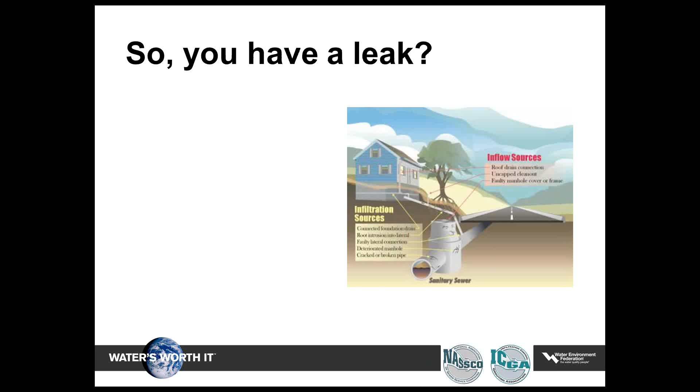So we'd like to start off with a simple question: you've got a leak, and what do you do? Many communities throughout this country are facing similar problems with leaky sewer systems. One of the problems is coming through one of 2 sources, either infiltration or inflow. Leaks in a collection system are typically categorized by their source, and these two terms, inflow and infiltration, are the primary terms used for categorizing where the leak might be coming from.

Inflow is water that is directly connected to the collection system from known sources, such as manhole covers, open cleanouts, downspouts, and groundwater sump pumps.

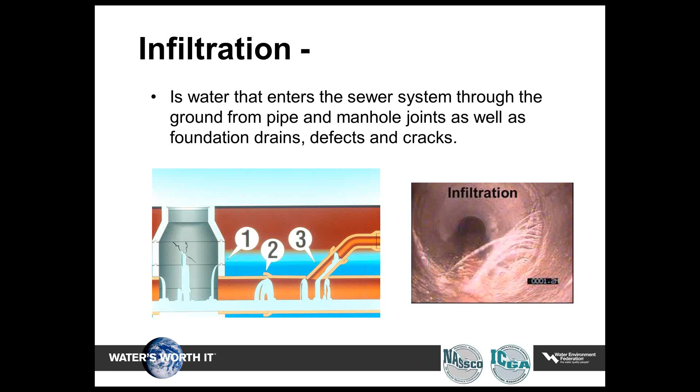Infiltration, on the other hand, is water that is typically percolating through the soil. It enters the sewer system through the ground from pipe and manhole joints, as well as foundation drains, defects, and cracks.

Here's a brief diagram showing where those specific items are coming from in a sewer system. You might have water entering your sewer lateral, or entering from the storm sewer and infiltrating into the sanitary sewer through various defects. You might have problems in your manholes, roof leaders, and items such as that.

What are the effects of I&I? Well, surcharging is one of the major effects we see across the country. Typically, when sewer systems are inundated with high levels of groundwater through various sources such as severe storms, the system will become surcharged, which then forces extenuating pressure on the system throughout the collection system.

This surcharging effect, which can occur at any time during these rain events, tends to wash fines into the existing joints. And this, what we call almost a breathing effect, that Dick Shantz will cover in more detail shortly, can cause severe defects in the joints and in the connections themselves.

Another effect of I&I is the loss of sewer capacity. Obviously, as the system starts to surcharge, there's sometimes not enough room for the existing flow.

Basement backups are, again, another problem, as well as water quality issues. Here in the Wisconsin area where I currently live, we struggle with beach closings in the Great Lakes, and they are sometimes attributed to overflows and issues with surcharging systems.

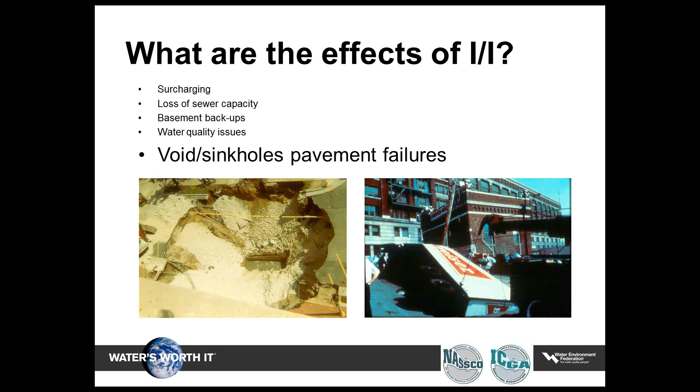Voids and sinkholes, pavement failures are on the extreme side where I&I can cause problems, but they are also issues that arise from problems with surcharging and I&I issues within this collection system. And then finally, we all end up paying higher sewer and water rates because of these I&I issues, simply because we're trying to struggle with methods to remove the extra I&I in the systems.

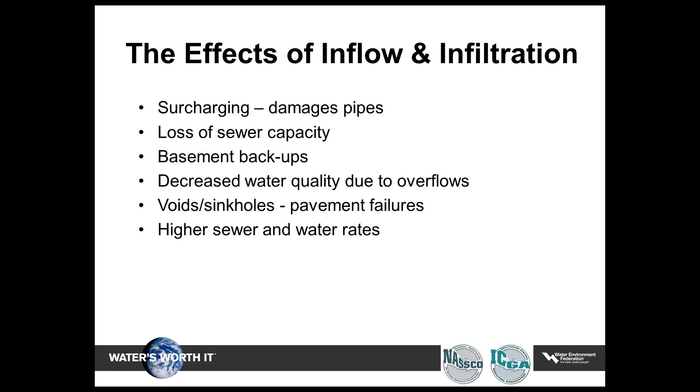So just to give a quick overview, the effects of I&I are pretty straightforward. You've got surcharging, loss of sewer capacity, basement backups, decreased water quality due to overflows, voids, sinkholes, pavement failures, and higher sewer and water rates.

So back to the initial question: you have a leak. Here are some of the items you need to be identifying immediately when you find those leaks. First of all, where is it coming from? Where is it located? Is it in a manhole, or is it in a specific pipe section? How large is it? Is it a weeper, a runner, or a gusher? Is it related to a structural defect?

That's an important question to ask, because that'll help determine the appropriate remedy or rehabilitation technique. And finally, how do you fix it? That's what we're going to focus most of this presentation on today - how do we fix infiltration, and primarily infiltration, and how it enters our collection systems.

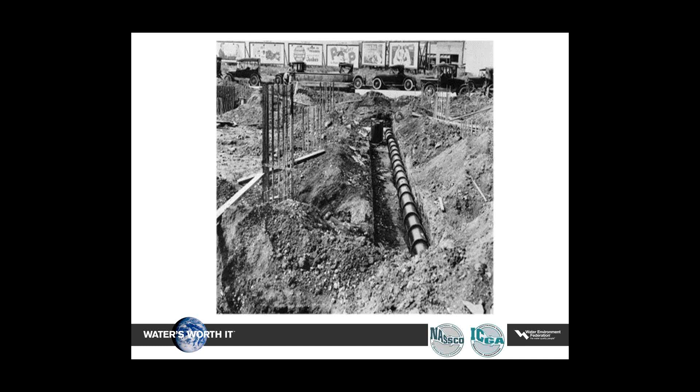And we put a lot of pipes in the ground. You'll see it again and again. There's one thing that stands out in these pipes, it's the joints, from our homes, from our buildings, everywhere to move sewage. And of course, we had to do it with something.

We needed pipes and fittings, and by 1908, there were over 70 clay tile manufacturers making their own joint systems, different dimensions, all kinds of stuff. Today, there's less than 5 manufacturers, and they all follow ASTM standards.

We rapidly settled on vitrified clay pipe. It was relatively cheap, easy to make in 2 or 3 foot sections, light enough for hand installation, and proven through history to be resistant to sewage, water, and gases. With good bedding, these VCP sections will last forever, but the joints, that's a whole different problem.

And we put a lot of joints in. We put over 5 billion feet of pipe in the ground in the last 125 years for sewer and storm. These short 2 to 3 foot pipe sections were all connected by simple joint methods which compensated for the cast clay surface irregularities, helping to maintain alignment and provide an initial static water seal.

Seal integrity was not a factor at that time. It was sewage, or it was stormwater. It could leak into the ground, no different than in the outhouses we were eliminating. And there were no required water pressure tests.

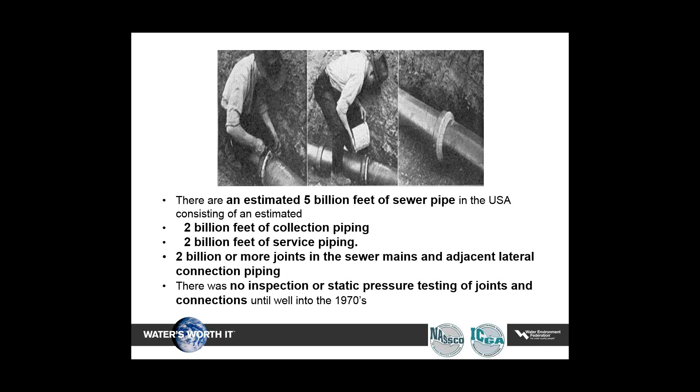In other words, there was no head test prior to the 70s, and even in later years in many states and communities. The large city sewer utilities, however, were well funded and the first to develop and enforce early construction material standards.

Poured tar joints were the normal practice, and you can see from this sketch that the tar drips on the inside wall, and you can see some of these today when you survey a pipe. As you might imagine, incomplete seals must have been common, leaving gaps, air pockets, cold joints as the tar randomly flowed into the joint. Without a water head pressure acceptance test, these sealing techniques, however, were considered sufficient and the pipe was accepted.

And a lot of concrete drain tile also went into the ground. Again, the seals were not really an issue. It was stormwater. It could leak into the ground. And, of course, more pipes continued to go in the ground.

The pipe segments were well aligned at installation, as you can see in this picture, because we used graded aggregate bedding materials. The pipes were well set. However, the bedding material porosity created an instant French drain effect in the sewer and storm pipe trenches. We built a drainage system on the outside of these pipes. These trenches continue to be the major water source driving sewer infiltration problems today.

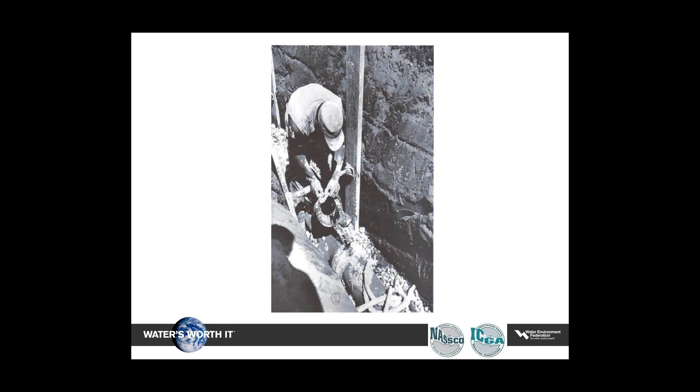Again we see the selected and graded bedding aggregate in the tar joint. Even in clay and loam soils around the country, the pipe bedding is providing a French drain, collecting and channeling future infiltration water on the outside of sewer pipes downstream toward any and every leaking sewer joint or tap connection.

Note the pipe is partially buried in bedding gravel, maintaining alignment while the joint is poured. Maybe this method, if you think about it, might explain why infiltration, common at the bottom 6 o'clock position on many pipes, is masked by normal sewer level flows. It's not easy to identify or note it during video inspections. Very often infiltration, if it isn't flowing rapidly, is not detected.

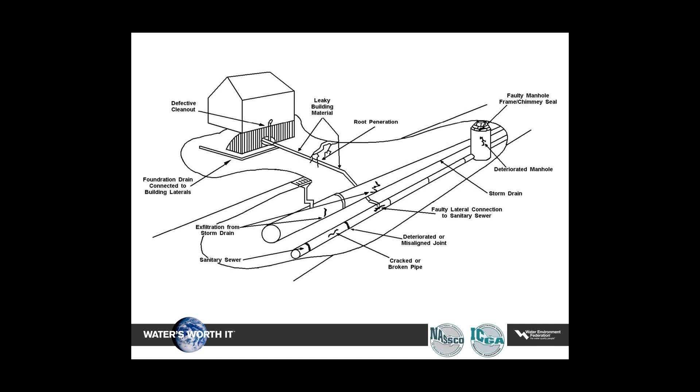You saw this in John's presentation. I'm going to go into it in greater detail, and you're going to see it in later presentations. Here's an isometric cutaway of the same drawing. We've added the storm and sewer trenches and bedding material to reveal how these pipes and trenches are interconnected. The trenches are not, however, in homogeneous soil like you see here. As you can imagine, as these trenches were dug, they crossed different types of soil that could be deposited in alluvial fill or in backfill, for any number of reasons. So there's all kinds of sections of the underground structure that naturally occur, that is just cut away and filled in with a pipe trench and a pipe. This diagram, first developed by Peter Keefe with ADS and presented in his article, Underground Waterfalls, clearly shows the interconnection

of storm and sewer water piping. I think you can well understand this. It may not be quite the arrow effect that you want, but you notice here's a stormwater pipe almost full. Water's coming out of the joints, filling the stormwater trench. As soon as it crosses the sewer trench, bam, it drains down to the sewer trench. So gravity-driven stormwater cascades down into the lower sewer trench, ever increasing volume as the storm continues. Once in the sewer trench, this water flows downstream, infiltrating into sewer pipes at every leaking crack, service tap connection, joint, and manhole. This type of migrating trench water is classified by the EPA as rain-derived I&I, or simply RDII.

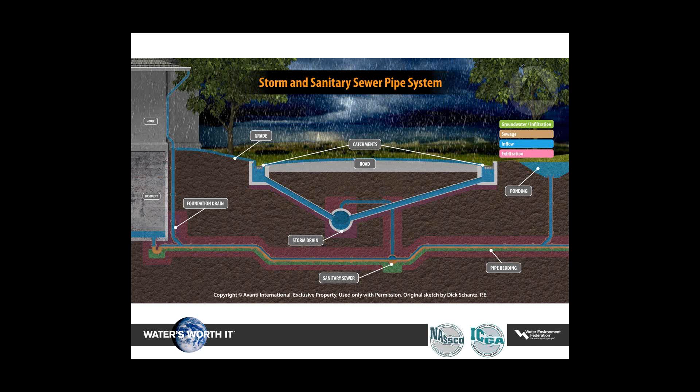Made out of tar, or some of the older ones out of oakum. There's nothing left there at all. It depends on what kind of city, the age of your city, and the part of the infrastructure you're looking at. Again, I take you back to this underground waterfall sketch.

You can see the draining down effect here, the same thing I just talked about. Many additional surface to underground stormwater channels or trench drains have randomly developed over the years into the storm trench and into the storm pipe. All of these are collecting groundwater, first towards the storm system, and then the storm trench, and of course it all just percolates down whenever it has an opportunity to cross flow to a lower trench, lower head, and that's just water seeking its lowest level.

As the storm continues, both the sanitary pipe and trench systems become surcharged. The increased water head drives more water into the pipe trenches and surrounding soil. It just gets worse, okay?

When the sewer main and trench surcharges, the lateral tap and adjacent service piping also get flooded, and vice versa. When I&I enters the lateral service pipe joints and trenches, it floods downstream into the main pipe and trench. So when you talk about rehab, you can't just say, I'm going to rehab the main. You have to see where's the water going to come back in. It's going to be at the laterals.

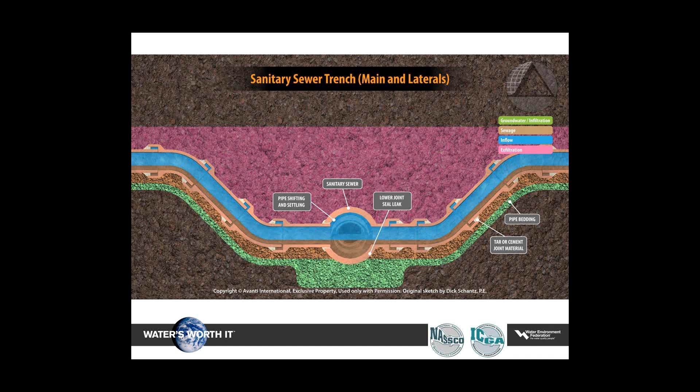I think you can imagine, without static pressure testing during pipe installation and acceptance, how well do you think the service tap connections and those aligning pieces of pipe segment were installed, especially if it was installed after the main had been installed with a hammer tap or some kind of a break-in tap connection. Many of those joints probably were put together, and from 3 o'clock around to 9 o'clock through the 6 o'clock position, there may be little or no seal, or it certainly has failed.

Okay, soon after the storm stops, the water will certainly begin to drain from the system. It drains from the storm, it drains from the sanitary sewer. But the trench system is still fully charged. This trench water, now loaded with bedding fines, soil fines, continues migrating, creating a high rate of infiltration through lateral and main pipe joints and tap connections into the sewer system, and continues until both the storm and sanitary and service pipe trenches, the water level has dropped and stabilized basically at the pre-storm level.

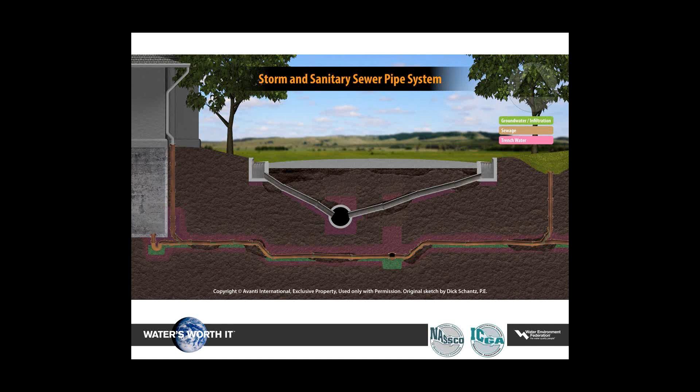So now we have the results of what's happening. You can begin to see here, the water's all drained away. There's some water still in the sanitary system, but over time, you've lost fines and bedding soil around the joints, under pipes, even under structures. It just continues. This has been going on for 50, 60 years. It didn't just start in the last 10 or 20 years when we started to look at it. From the very first rain event, these underground channels, this washing away of the pipe bedding fines has been continuing, and it continues.

Unstopped. And of course, if you just let it go forever, you'll see what happens. We've talked about it. You've seen the catastrophic failures, but there's a lot of underground semi-failures or approaching catastrophe.

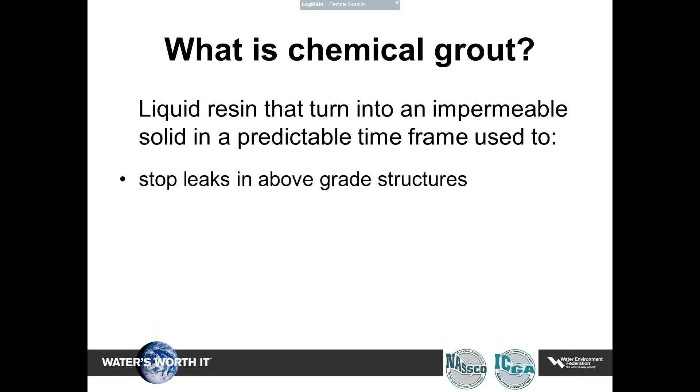Thank you, John. Good afternoon, everybody. We'll take a few minutes to look at better understanding chemical grouts. Many of you are familiar with them, but we'll take a moment to look at a simple definition. Chemical grouts are liquid resins that turn into impermeable solids in a predictable time frame. Essentially, they're used to stop leaks in above-grade structures, stop infiltration into below-grade structures, stabilize soils, control groundwater, and also seal the annular space between the host pipe and the liner.

I'll define a couple of places where chemical grouts are used, and what's significant is we talk with municipalities all over the country, and they're amazed to realize that the same chemical they're using to seal mainline joints and laterals is used all over the world in a variety of applications and even in different markets.

In the 1950s, acrylamide grout in particular was first used in the U.S. for soil stabilization, and then in the 60s they began using it for municipal applications. This slide shows in the 1980s, 1985 in particular, the U.S. Department of Energy started a 20-year program where they tested 7 different types of grouts.

Their goal was to determine what they wanted to use to encapsulate radioactive waste, so it had to be a long-term solution. This image shows the project, and this illustration depicts how they did it via probes from the surface. After their testing, they chose acrylamide grout because they determined it had a 362-year half-life in the soil. That became very significant for the grouting industry because we know the grout lasts a long time, and it really comes down to, as the NASSCO spec suggests, proper mixing and proper injection. We'll talk a little bit more about that in the future.

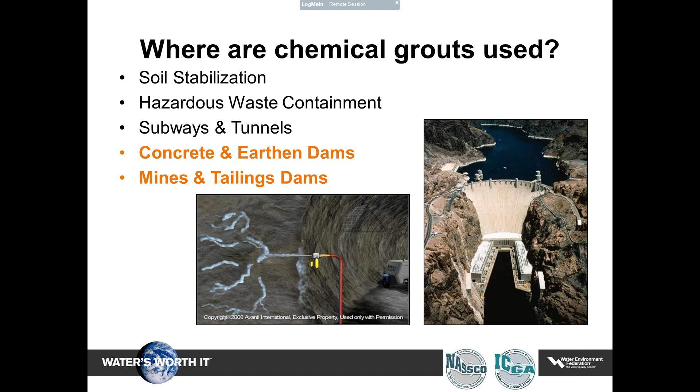Grouts are used in concrete and earthen dams, mines, and tailings dams. The image on the left, I got to go into a mine 1,500 feet down, and they cored 260 feet and then grouted that core. Then they went 8 feet to the right and 8 feet to the left and cored again. You could see the grout in those cores, even though it looks like it traveled through solid rock. It was super fine cracks, and it had at least a 16-foot diameter spread there.

Slab lifting, primarily foams. These foams you can inject under a concrete slab. It will not only stabilize it, but it will lift it back up. And you can drive a truck across it in 15 minutes. Ed Paradis will talk more about foams coming up.

Underwater applications, tunneling and TBM applications, pre-excavation and dewatering. This image depicts a project in Michigan, the city of Dearborn. They were putting in underground storage tanks as a means to deal with their sanitary sewer overflows.

And these tanks were massive. They're 120 feet wide and 150 feet deep. And in a couple of locations, when they drilled into the ground to start construction, water shot up into the air 20 feet due to artesian pressures underground. So their options were to dewater or to do pre-excavation grouting, and that's what they chose to do.

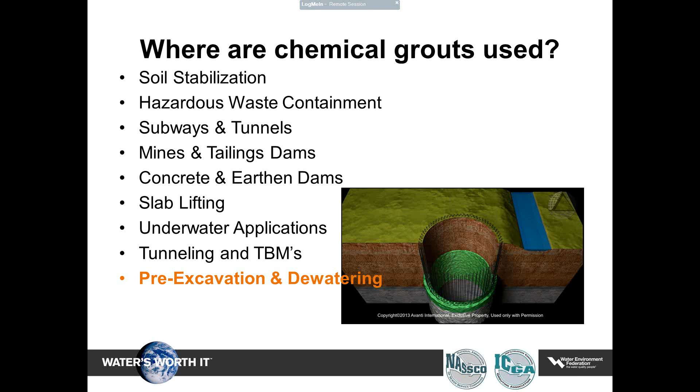So you can see a double row grout curtain here. And they pumped acrylamide grout, like 200,000 gallons of that, and 10 to 20,000 gallons of ultrafine cement. They created an area where they could begin to excavate and sink the caisson, sink the tank, and not have to deal with as much water infiltration into the construction site.

Beneath and around underground structures, you see a manhole here. As you saw in the tunnel, it doesn't matter what the structure is. You can seal it. You can stop the infiltration and the leaks without excavation.

And then finally, mainline sewers, laterals, and manholes. And in this image, you'll see what Dick talked about as sealing the entire system. If you seal the mainline joint here, the water follows the path of least resistance and comes in wherever it can. Maybe that's the manhole, maybe it's the lateral connection, or maybe it's several feet up the lateral. So you really need to address the entire system in order to see reduced flows at the treatment plant.

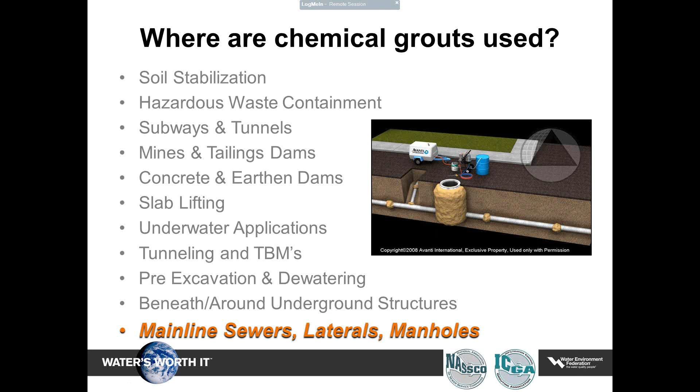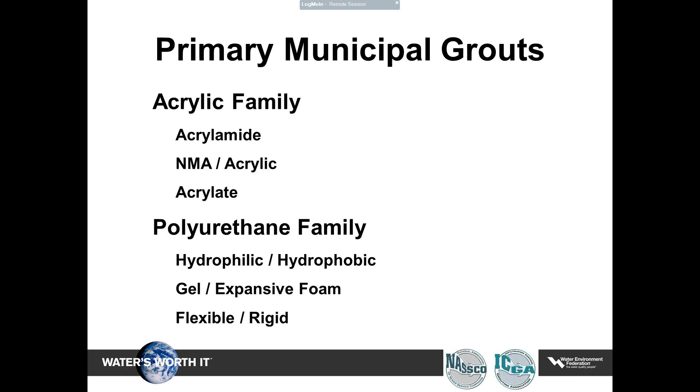There are different types of grouts on the market. There's cement and bentonite, silicates, urethanes. The primary municipal grouts are in the acrylic family or the urethane family. For acrylics, there's acrylamide grout, NMA or acrylic, and acrylate grouts, all similar and all used in the same way. And then the urethane family, you have hydrophilic or hydrophobic gels and expansive foams, and they can cure flexibly or rigidly. I'll focus more on the acrylic side because they're used more often in the main lines or the laterals.

That's a standard gel time for maybe grouting an 8-inch pipe. And you can control that gel time in the field anywhere from 3 seconds—you can make it become a solid in 3 seconds—all the way up to 14 hours. So being able to control that in the field is very important and unique to these types of grouts.

There's no suspended particles like you would find in cement. If you inject cement into rock or underground, it can only go as far as the particle size will allow it to go before it gets clogged up. These grouts, there are no suspended particles. They just are a liquid that turns into a solid.

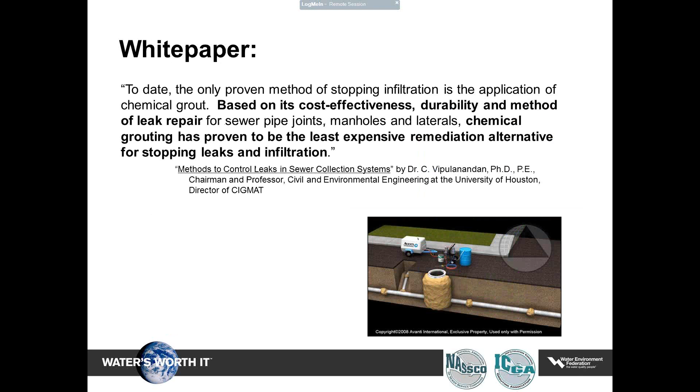This is a quick quote from a white paper from Dr. Vipulanandan. He's the chair of the Civil and Environmental Engineering department at the University of Houston and also the director of CIGMAT. And he says, based on its cost effectiveness, durability, and method of leak repair, chemical grouting has proven to be the least expensive remediation alternative for stopping leaks and infiltration. And John, I'll pass it back to you.

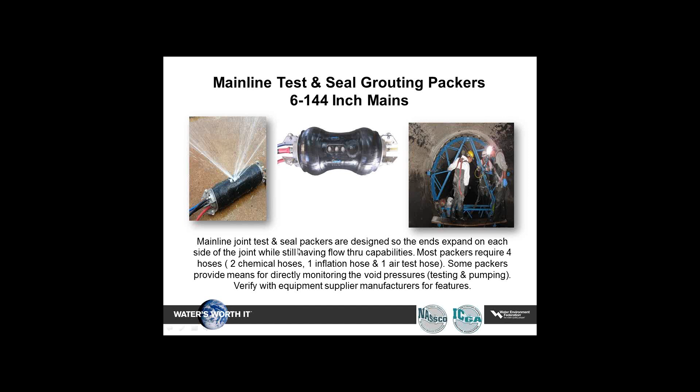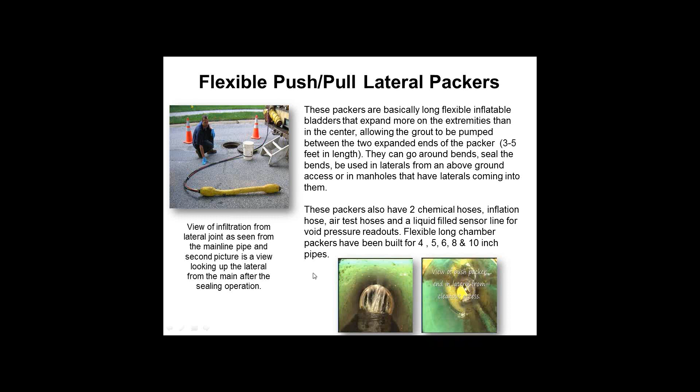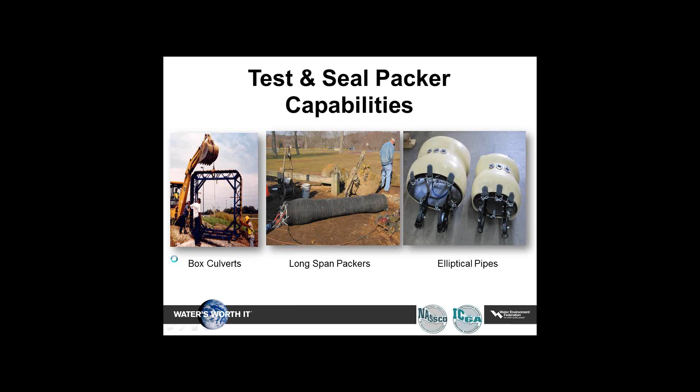Test and seal packer capabilities - over the years, there have been different packers built and put in the field, box culverts as you see on the left, long span packers, and you have to be careful here. A longitudinal crack will be defined as a structural defect, so this can be used prior to another technology to rehab or renew the pipe. We're seeing more and more storm sewers, elliptical pipes being installed. The joints need to be air tested and sealed, so there are different units out there that are available.

Also in the back of the mobile unit, what we're seeing here are stainless steel tanks with heater bands around them. During the wintertime, at least up in the northern part, it's nice to keep the water at a similar temperature to the sewer water. Secure lids, electrical mixers, so basically you can mix your A and B components first, making sure everything is done right.

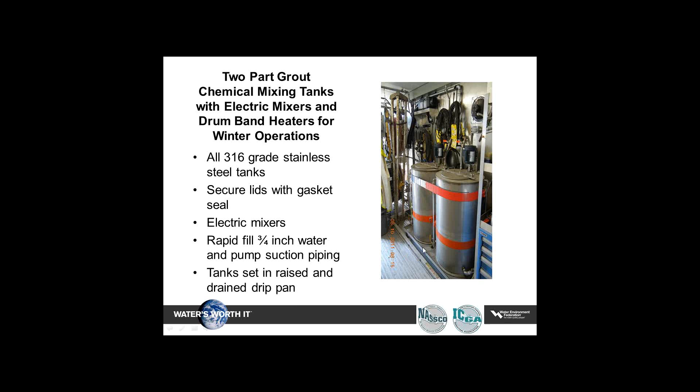3/4-inch lines bring the water in, because these are basically water-based solutions. Bottom drip pans are here, so if anything falls in, everything's safe. There is some equipment involved here, but it's being done daily by contractors and municipalities around the nation. Unfortunately, manholes are not always located in the middle of the streets, so this equipment does allow for some ease of access to these points.

Every job site may be different. Contractors usually adapt, and they've found ways over the years to do so.

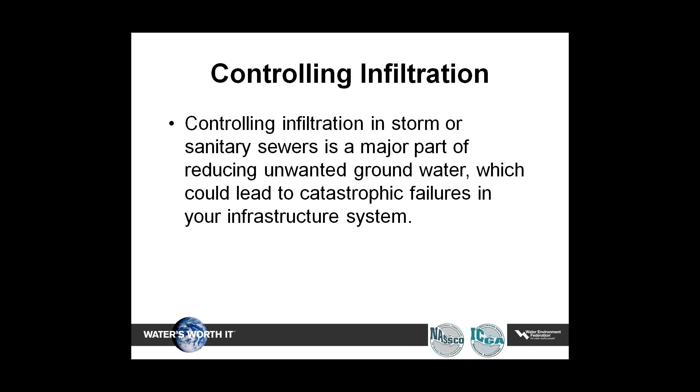Some of the applications where you see chemical grouts are manhole grouting, lateral grouting, storm pipes, and probe grouting, which we'll get into up front. This is basically your collection system. The geotechnical market is basically the same, done via probe grouting or fracture grouting into tunnels, as Daniel discussed earlier.

The four basic categories that Daniel talked about earlier are the acrylics, the acrylamides, and the polyurethanes. The important thing when specifying the correct material is the wet-dry cycles, freeze-thaw cycles, voids, movement, size of cracks, volume of leaks, and the type of structure. Those are very important to remember when specifying the products.

We've had engineering firms over the years say they tried chemical grout and it didn't work. Then you ask what material they tried - it may not have met the wet-dry cycling or freeze-thaw cycle requirements. There are NSF 61 approved products for safer environmental concerns, phthalate-free materials out there that will help you specify if there are concerns to the environment.

Two types of polyurethane grouts are hydrophilic and hydrophobic. The hydrophilic materials are a resin only, with no catalyst. They have a great bond, but because they absorb so much water, they have a medium to high shrinkage rate.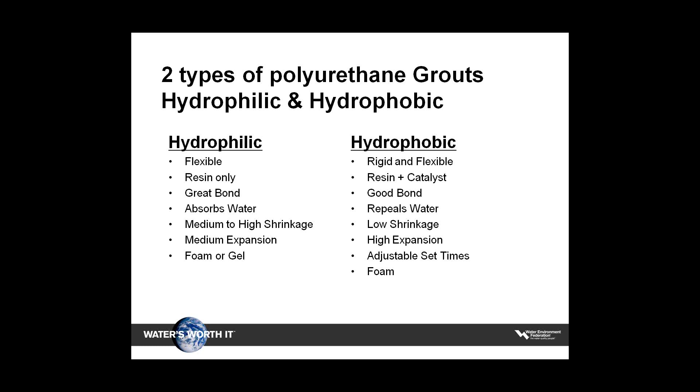The repair process for sealing both brick and precast structures is commonly performed through similar procedures. Though the procedures may vary, the end result is the same: a dry manhole that will prolong the life of the collection system. Many municipalities and specifications call for grouting and coating everything after it's done. But if the manholes aren't eaten up with chemical attack, you can avoid that coating, prolong the life by stopping the leak, and your budget will stretch a little further.

Step one when grouting a manhole is to slow down the leak, using oakum, hydraulic cement, or a mixture of both. Don't just go into a manhole and start pumping material, letting it wash down the main line. Get in there, soak the oakum in the chemical grout and hydraulic cement, and slow the leak down to minimize your waste factor.

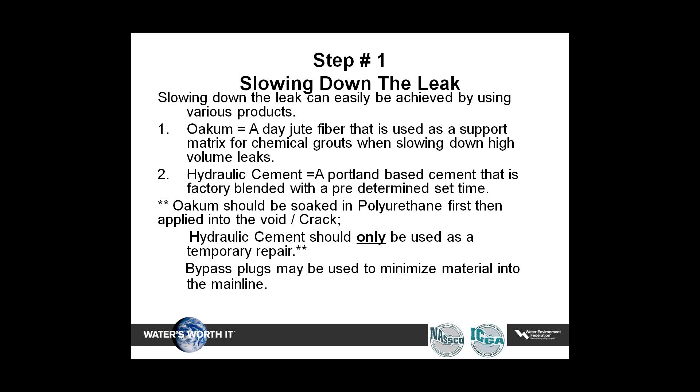Entering the structure is done with equipment like this - except one problem here is that I wouldn't enter a sewer manhole with a cigarette dangling out of my mouth.

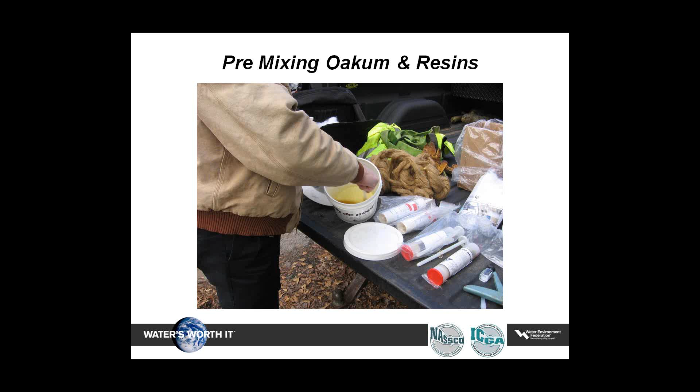Pre-mixing the oakum and the resin, soaking the oakum in the bucket with the resin allows the resin to absorb into the oakum. So when you stuff it in and around the pipe penetration, the active infiltration coming in is going to react with the oakum-soaked material and stop the leak. Then you can back grout it with some cartridge materials if you're using a cartridge application.

Injecting methods may vary from contractor to contractor, but the goal is the same: stop the water. For brick manholes, drill to the outside of the manhole through the brick, not through the mortar joint, so your injection port or wall spear will have a solid area to lock onto. Start the injection at the bottom, working upward. Brick should be curtain grouted to ensure the whole area behind them is sealed.

For precast manholes, repair all pipe penetrations prior to grouting. Oakum the rings if they're too wide. Drill the injection holes into the ring in a clock position, then start the injection again from the bottom ring, working upwards, shooting the rings. Address all cracks that may be visible on the sidewalls.

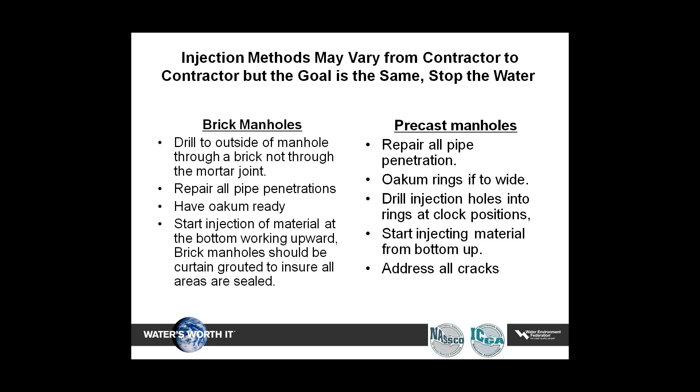Here's a brick manhole that was injected with chemical grout, and you can see down there at the very bottom where the grout had gone through the brick to the outside and has come back in.

Injecting a precast manhole, you see the moisture and water down here on the ground. After the grouting, you see how the grouting will come back up.

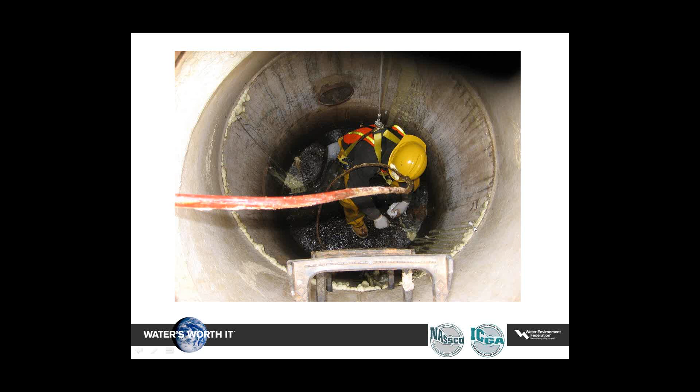This is a precast ring. You see over here there's a port in there. We actually injected the entire ring of the manhole off of 2 ports.

Again, another ring sealed. And down in the bench, you see at the bottom, they actually used a plug to minimize the grout that was traveling down the main line. So that isn't a sealed up main line, that was actually plugged off. But you see in the ring how the grout had traveled and sealed.

Water blasting the probes into the ground can be done by the vac truck. You can drive them down if the soils permit. Probes are inserted to a depth, again, of 1 foot below the bottom of the pipe. Polyurethanes are typically shot here, so keep in mind that polyurethanes are a foam, they're going to expand upward. So if you stop at the top of the pipe to do your grouting, your grout's going to expand above the pipe. So get down below the pipe, let the chemical grout work to your advantage and expand up and seal the leaks as you pull the probe up.

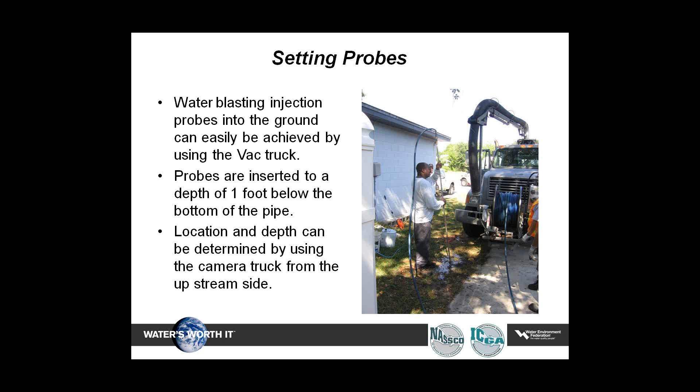Injection can be estimated at 1 gallon per vertical foot on average, stopping at the top of the pipe. So you have 1 gallon from a foot below, 1 gallon at the bottom of the pipe. On a 24-inch pipe, you'll have another gallon, so basically a probe is going to be 4 gallons to seal a 24-inch pipe.

Recap: check the structure after injection to ensure that all leaks have been sealed. Document the job file, material used, amount pumped, amount of infiltration stopped, and whether further coating or lining is needed for that structure. The amount of infiltration can range anywhere from minor leaks to, we've had success, up to 2,000 gallons a minute. Chemical grouts can be used in that range of infiltration.

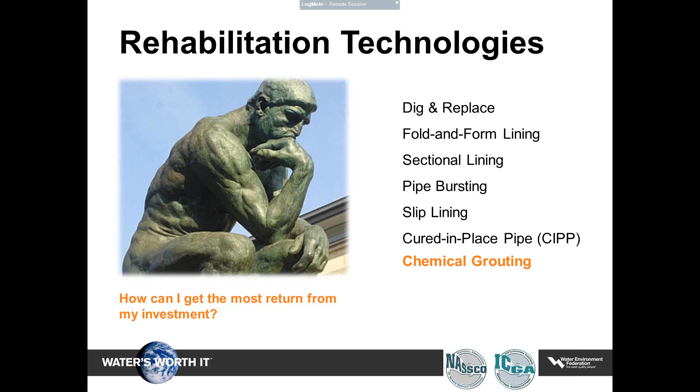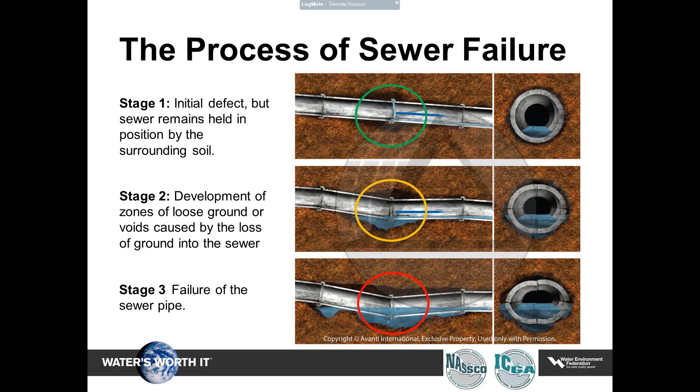In stage two, you see that there has been no preventative maintenance, so now you're starting to see undulation of the main line, and you're starting to lose your system. Even though, as Dick said, it's clay pipe, the pipe is still fine, but you're losing those joints. You could grout it as well now as part of a preventative maintenance program. And then stage three is failure of that pipe, and now you can't grout it, and you've got to do something much more costly.

Here, we'll try to take a look at a quick animation. Hopefully this will play well on your screens. This is a 30-second excerpt. You see the camera on the right, the packer on the left.

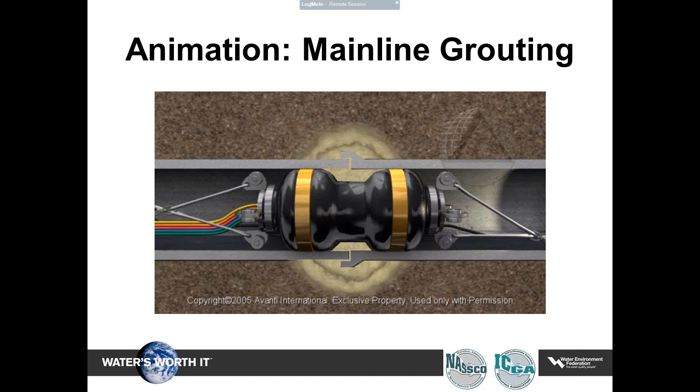Even if that joint wasn't visibly leaking, as Mark said, they would do an air test on that joint. Here it's visibly leaking, so they know they need to grout it. They pump once, let it cure, pump again. They try to pump till refusal per the spec. And when they remove the packer, the majority of that grout will just break off and flow to the treatment plant.

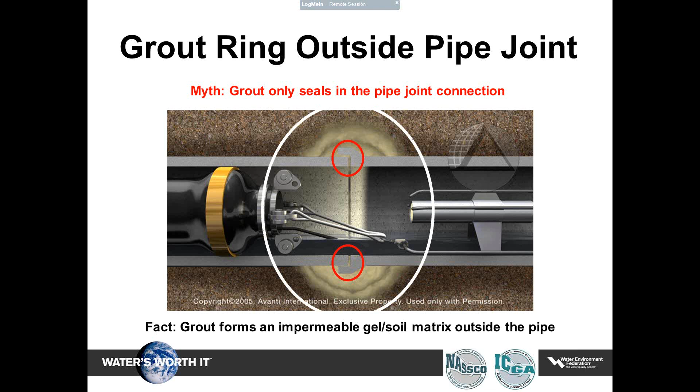And what you're left with, as shown here, is what they call the grout donut outside the pipe. So there's a myth that grout only seals the joint itself, but in reality, the contractor needs to pump enough material to get into the soil. It's a soil sealing process, and that will prevent exfiltration of sewage. It will also prevent infiltration of groundwater. And here you see what they call the gel soil matrix outside the pipe. This is an image of the grout donut 25 years after that line was injected.

In terms of working with structural technologies, chemical grouts really help or complement structural technology. This is from the EPA, from a document they published last year. CIPP is excellent long-term repair, but will not provide a permanently watertight system. And here, from the Army Corps of Engineers, the liner should be adequately sealed at the laterals.

So let's say you've got a lining scenario. You need a structural solution. Sometimes chemical grouts can be used before lining. Let's say your joint looks like this - you've got a gusher per the PACP terms. If you don't stop that water before coming in, you could get a bubble or a lift in the liner. At the very least, you'll get a weakening of the liner. So they'll grout that and then line that section of pipe.

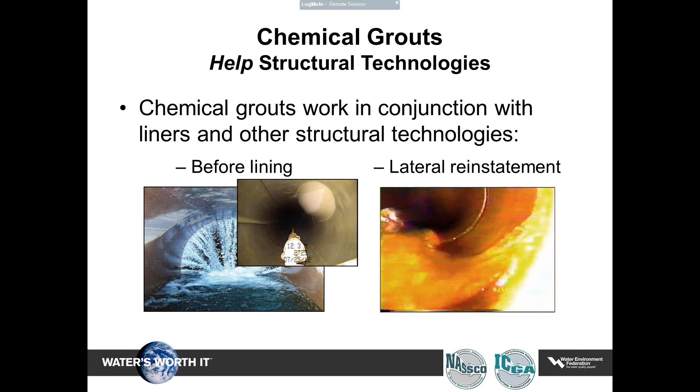In the other instance, for lateral reinstatement, hopefully this plays well - what you're seeing is infiltration, water coming in from the top and the side. That's between the host pipe and a liner. It's clearly not coming from the lateral or from the house. So that's coming in the annulus, and they'll grout those lateral connections as well.

So you want to stop the water so that you don't end up with either of these. The photo on the left shows leaks and deformation of a liner and a main line. This is, I believe, a 36-inch line in Granite City, Illinois. And they had lined it 20 years ago.

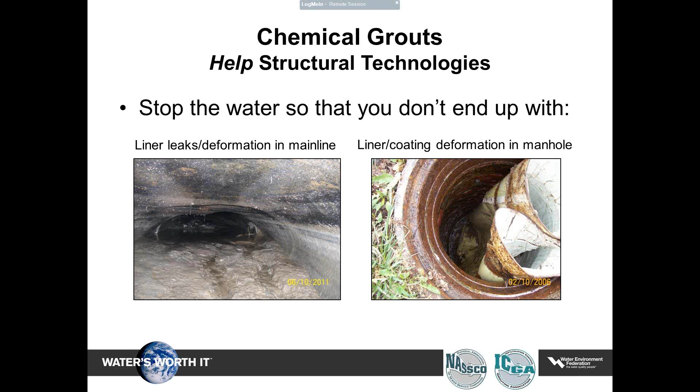The water that was coming into the host pipe and traveling in the annulus brought soil and fines with it, the pipe bedding with it. So it developed voids outside the pipe, and the pipe shifted, which caused a shear of the liner at the joint. And so all of that material came into the pipe. The image on the right is a manhole - they didn't stop the water before they put this coating on, and so you had failure of the liner or coating. This is just a quick case study to sum up main lines.

Water and soil is entering the system 24/7. This is a 1992 case study in Sunrise, Florida. They had flows equal to 700,000 gallons per day at the pump station.

The city sealed a 500-foot section of 12-inch pipe. The joints were every 5 feet, and they pumped 700 gallons of grout at a cost of about $6 per gallon, mixed grout. They reduced the flow by over 600,000 gallons a day, and they were spending $1,300 a day to treat that infiltration, at about $2 per 1,000 gallons.

So if you look at the payback timetable, you take the cost of the grout, $4,000, divided by what they were spending per day to treat that infiltration, and they made their money back in 3 days. Again, that's only including the cost of the grout. I know there are a lot of other variables to take into consideration, but at the end of the year, they had a total annual savings of $480,000.

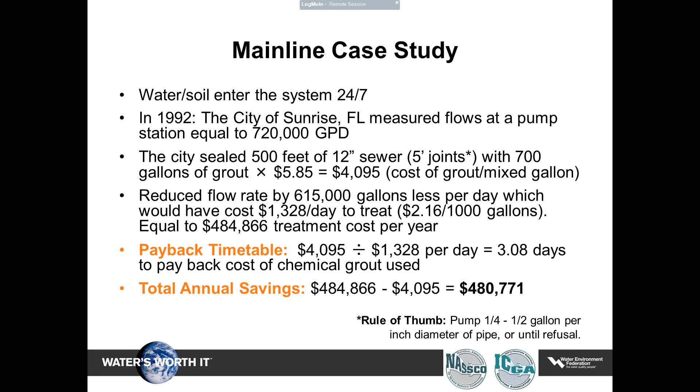This rule of thumb here shows, according to the NASSCO spec, the contractor is going to try to pump a quarter gallon to a half gallon per inch diameter of pipe. So easy math, if you're in an 8-inch pipe, you might try to pump 4 gallons. You may pump more than that if you've got a larger void, and less if you've got a tight void space.

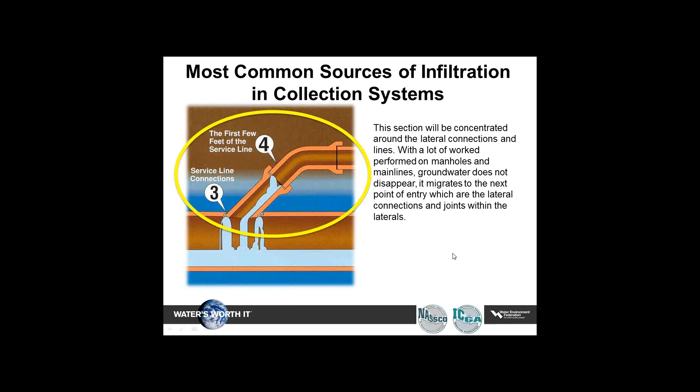Water doesn't disappear. As we fix these issues in the mains and the manholes, the groundwater table rises. The next point of entry is the laterals. Go back 15 years ago, infiltration numbers of lateral connections was very low. But as more work is being done around the country, people are finding out that water is coming more and more from the service connections.

Now, the grouts commonly used in controlling infiltration in laterals: we have our acrylamides, our acrylates, acrylic resins, urethane gels, and urethane foams. Not recommended for service connections, urethane foams.

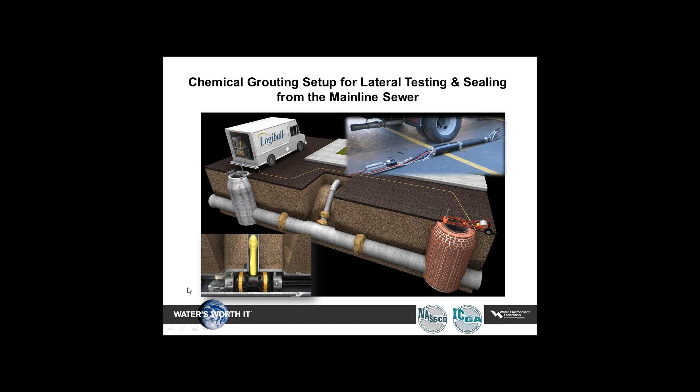Lateral tap connection grouting prep procedures. What's the first thing you have to do? Of course, you have to clean the mainline sewer. Videotape CCTV inspections of the mainline and pan and tilt of the lateral. If the intent here is to seal effective sealing distance past 6, 7, 8, 9, 10 feet, whatever it may be, it's strongly recommended to inspect the laterals, either from the main or from an above-ground access. Depending on the TV results, cleaning may be necessary before anything is done to the laterals.

Identification of the diameter of the laterals: are they 4-inch, 5-inch, 6-inch? Protruding taps of more than 5/8 inch, or anything that's basically going to prevent the equipment from going down the pipe, sealing either the bladders, the main line, or lateral, must be removed in order to provide a good seal of the rubber elements. Bypass pumping is normally not an issue, as the packers are only inflated for a short period of time, which basically results in cost savings in the long run.

The lateral packers work best with the 5-hose system, as I said earlier. You have your chemical hoses on the extremities, mainline inflate, the air test basically to pump air into the void, and the controls or the hose for the lateral bladder for inversion and vacuum.

As you saw earlier, the same mainline units can have different configurations. One important thing is if you decide to go with a 15-foot bladder, from here to the end it will be 15 feet, so you are dragging a longer piece in the main line. So typically, just an above-ground picture access demo here, the packer would be winched into position.

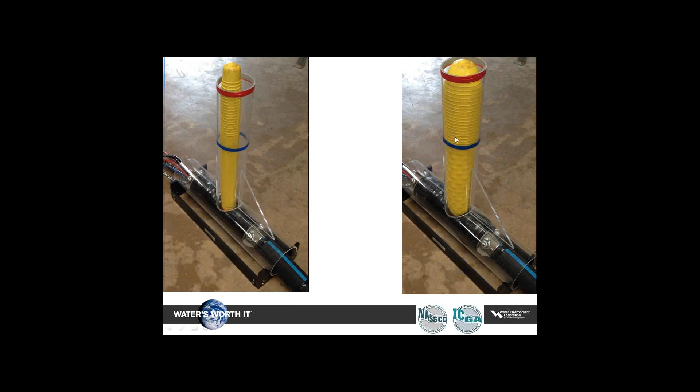There's a motor for rotation clockwise and counterclockwise to line up the bladder. Once the operator lines up the bladder, air is used to invert the lateral bladder out to its full length, where the last 12 inches will seal up against the pipe. The remaining portion expands slightly less, allowing grout to be pumped from the main line, fill all the voids, travel along the bladder, and out through any existing defects into the soil. Once the test and seal procedure is performed, the bladder is brought back with a vacuum into the mainline packer, which is then moved to the next connection where the process is repeated.

One of the things we look for from a manufacturer is the void between the packer and the pipe. Manufacturers will provide packer-to-pipe voids, which is important to determine an appropriate gel time according to your pumping rate.

Here we go with the gel times of the grout. Every time we mix a new batch of grout in the truck, a cup test is performed to determine the gel time. Why is that important? We want the grout to exit the defects before it gels. If you know the packer-to-pipe void and the pumping rate of the equipment on the truck, how fast you're pumping A and B side combined, then you know how many seconds are needed to fill that void, and can determine how long the gel time needs to be, depending on how far you want the grout to travel outside the pipe.

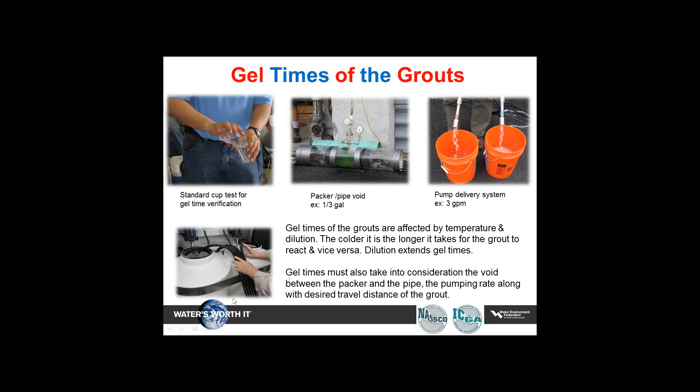Infiltration and lateral reinstatements after mainline relining.

Contractors are putting great pieces of pipe in the ground, but unfortunately we have to service the communities and homeowners, so they basically put holes in them. And water finds its way into the main line back through these openings. Here's a quick animation of lining in conjunction with grouting, where the technologies basically complement each other.

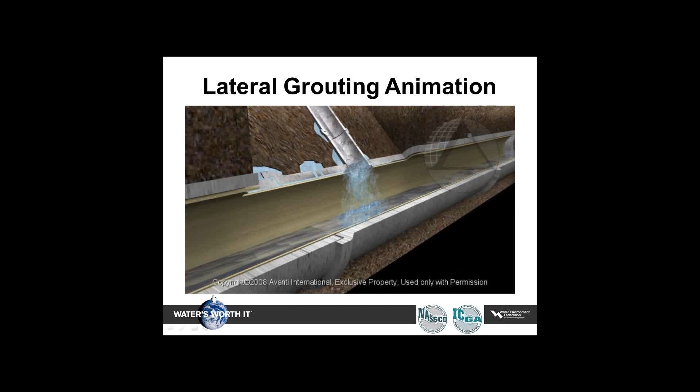Line pipe, reinstated. Groundwater, of course, does not disappear, it just moves on to the next point of entry. The packer is pulled into position, rotated. Air pressure is used to invert the lateral bladder out into the service. In this case, effective sealing distance may be 10 to 15 feet. We assume the line has been pre-TV'd and possibly cleaned.

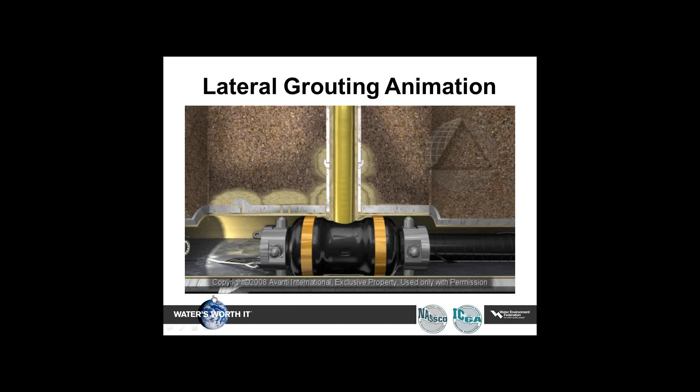Grout is injected in stages, where it travels along the pipe and out through existing clay or concrete pipe defects into the soil. The bladder is removed after the post-test operation, and we move on to the next service. So the soil has been sealed around that structure.

When it comes to cleaning laterals and you don't have a clean-out access or can't find one, there are tools out there to prepare the work to be done. The picture on the left shows a root intrusion at 32 feet from the main. A device with a cleaning nozzle and hose is launched into the lateral to clean that distance from the mainline connection. So pre and post inspection can tell you what this thing can do.

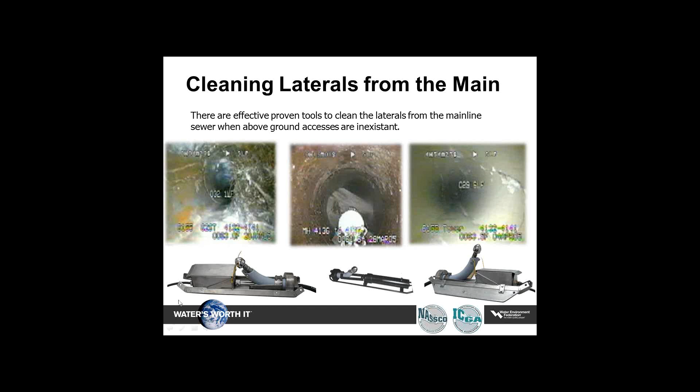Going back to the sealed service, grout will travel between the liner and the host pipe. If the gel time is long enough and conditions are appropriate, it will find a way out into the soil. So it's basically a double seal between the liner and the pipe, and out through the existing defects into the soil, and up the lateral for that predetermined distance.

The important thing to understand is we need to go out into the soil and saturate the bedding or fill voids. The pictures you see here are from above-ground demonstrations with an 8-inch main line. This is PVC, with a 6-inch piece of pipe stubbed in like a hammer tap, and whatever Home Depot sells for backfill was used here. So sealing the soil between the soil particles, making this one solid grout-soil mass, is the intent, preventing groundwater from coming in.

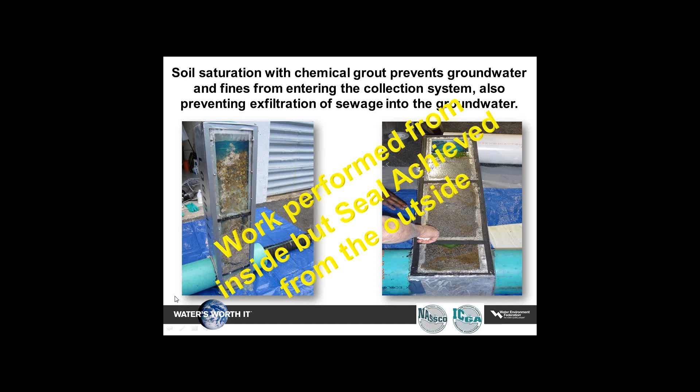The left picture basically shows us a view with a camera. Here's our lateral at this position. The green is basically dye that's being used in the grout to confirm that we have set over the joint and proper mixing. The picture on the right shows us from the main line up into the lateral the residual grout that remains on the inside of the pipe, which is very fine, as you see here. We're talking quarter inch or less.

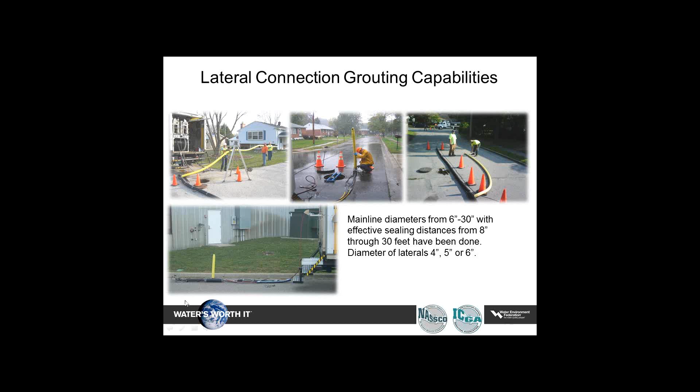In many cases, when continuous pumping cannot provide a seal, we're going to pump in stages. What that means is basically we're pumping through the initial gel band out and build layers of grout until we can achieve a seal, or basically refusal, or it's determined that this one can't be sealed. Sometimes you can find some, I'll call them caverns on the outside, or huge voids, and it has to be determined at a point, can we seal this or not, depending on the void volume behind the pipes.

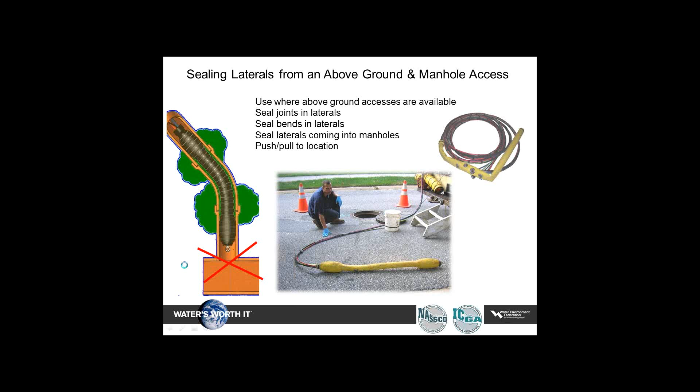Push packers - here's an operator that will use this where he has laterals coming into a manhole. So he will seal this 5 feet at a time in this case. They're also used to seal service laterals, but not the connections, when they have above ground access and it's feasible to push it down through not 4 45-degree bends or 6 90-degree bends, depending on the configuration of the laterals.

Here's an example of what's been used. This is a lateral, 90-degree bend, brand new PVC pipe, had a crack in it, water's coming in. A packer was used to seal off infiltration, basically grouted that 90-degree bend.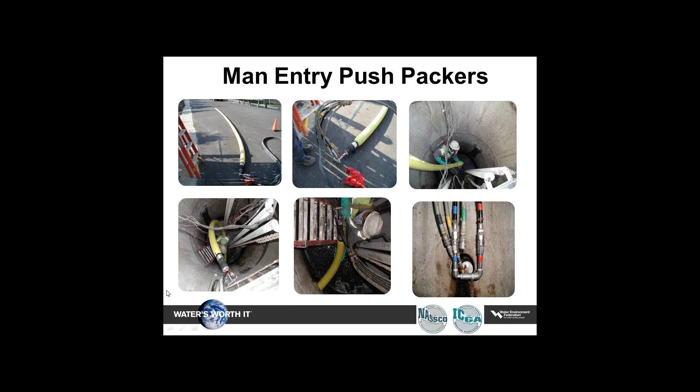Successful grouting projects require a couple of things, and one of the important ones, of course, is an experienced crew and knowledgeable inspector. The grout mix and additives - what are you pumping? The gel time versus a packer pipe void versus your pumping rates. You want to make sure that you can fill the packer to pipe void before any reaction occurs. You want to get that material through the cracks out into the soil.

Your void pressure is measured at the packer and pumping through refusal. When the joint can't take anymore and you've pumped to high pressures, higher than the groundwater, and some, then we know we've achieved a seal. Have a logbook of the work performed. It's important for the utility, for the contractor and the engineer, what's been done, how's it been done, and keep a logbook of it. And of course, good specifications.

There are specifications that are out in the marketplace. There are ASTM standard practices for sewer manholes using chemical grout for mainline joints and for lateral connections. And as early as last year in 2012, NASSCO and ICGA standards were released in April. This is one document that you can find on the NASSCO or sewer grouting website. With this, I will answer questions and pass it on to John.

Thank you, Mark. I do have a few questions. I'm going to kind of direct these to individuals here amongst the last three speakers. So Ed and Daniel and Mark, be ready for a couple questions coming your way. This one I'm going to send to you, Mark, first of all. The question is, you mentioned that grout has a half-life of 300 years.

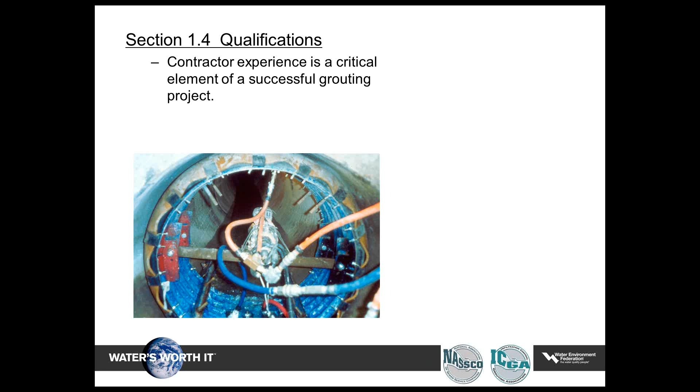Qualifications and finding good quality contractors in the grouting industry is probably one of the challenges in some marketplaces across the United States. There's quite a few in certain areas, and there's fewer in others. But since the grouting technology is required to use an operator in a truck, and not everything is always visible from that truck, the grouts are pumped into the ground, it requires a technician that is highly skilled. So identifying company and operator experience requirements should be something that you'd always look for when you're putting together a grouting specification.

The equipment is also critical. It's got to be capable of introducing air under pressure into the void area. When we talk about void area, we're specifically talking about that area between where the packer seals and where the joint is located. We need to be able to pump air into that area so we can actually test to see if the joint has failed and if we have an area where we need to be pumping grout.

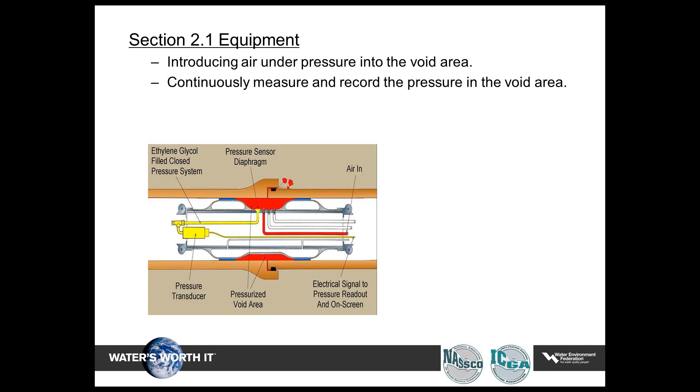And the ability to continually measure and record the pressure in that void area is also critical. You want to have the proper equipment in the pipe so you can be able to monitor that pressure during the process. And the pump should be capable of delivering a mixed volume grout at 3 gallons a minute, somewhere in that range, so that you can pump sufficient grout to form the grout curtain or the grout seal on the outside of the pipe.

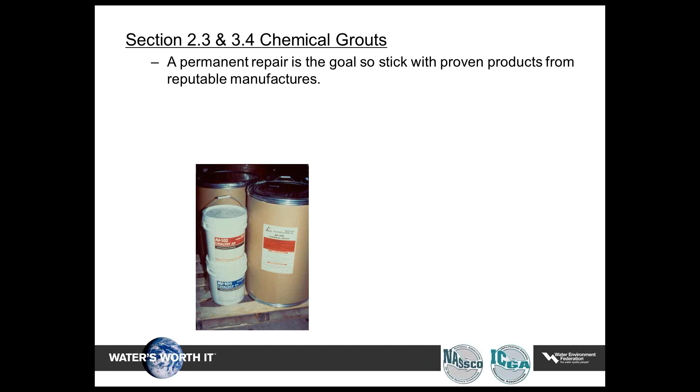The chemical grouts do provide a permanent repair, which is the goal, so stick with proven products. There are some great manufacturers, and we just happen to have 2 of the most outstanding grout manufacturers in the country presented as part of this presentation, with De Neef and Avanti as presenters here. Gel times, pressures, and mixing ratios are the most misunderstood items to which an experienced operator can provide significant benefit. When in doubt, I recommend you seek a professional.

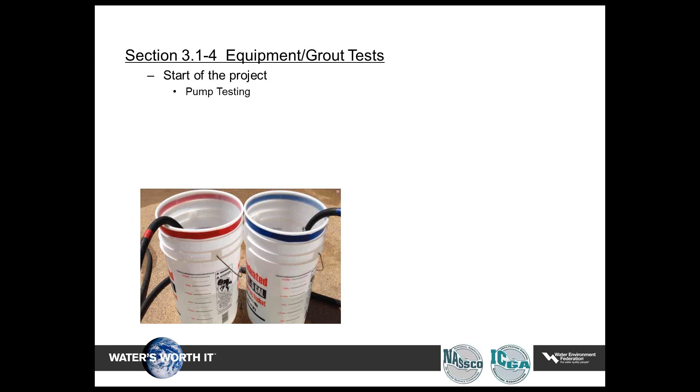The equipment and grout tests are a couple things that are typically neglected in most grouting operations done in the field. At the very start of the project, you need to do a pump test to make sure you've got dual hoses pumping the 2 components of the grout at the proper ratios. So typically we'll do a quick pump test before we start the project.

Next, we need to do a barrel test, which is simply taking your packer and putting it on a good sound piece of pipe and seeing that your gauges and your air pressure monitoring devices are all working properly.

And finally, throughout the day, you need to be doing grout testing, which is testing your grout to see what your gel times are and making sure they're what you anticipate. Your grout gel times will change over the course of a day based on the temperature and other factors occurring in the pipe.

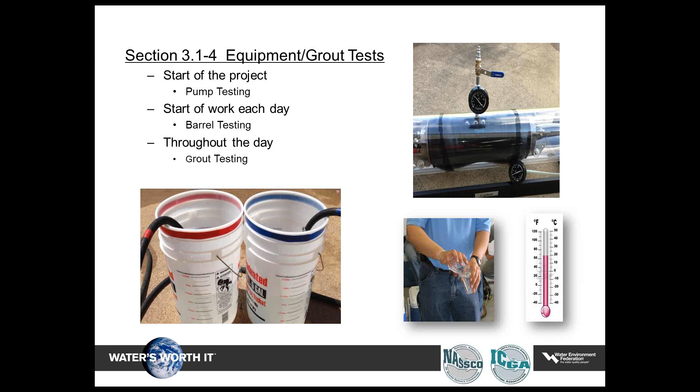Pipe preparation is another critical item. One question that came through earlier was how do you prepare a pipe in large diameters, 18 to 24-inch pipe especially, specifically how to handle deposits in those areas. There is equipment available for handling deposits in up to 24-inch pipe.

Chain flailing type systems and water pressure systems are available for those dimensions. You can certainly find those readily through your normal equipment suppliers, your Vactor and Vacon and such. Those suppliers typically supply the type of equipment to remove deposits in those sizes. But you do need to get the deposits, roots, and debris out of the system, and they must be out before you start your test and seal project.

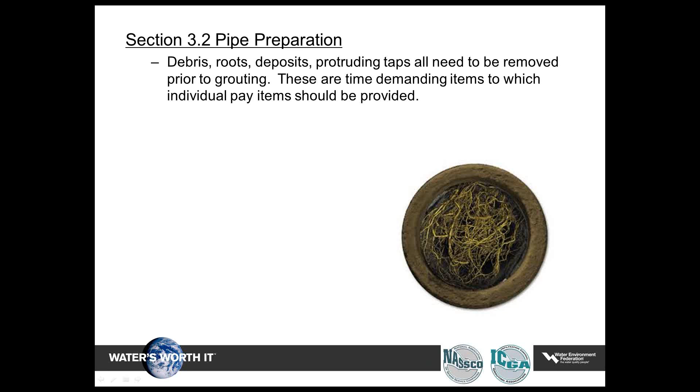Lateral cleaning, in advance of connection sealing, is a completely different process than mainline cleaning. Sometimes we'll see specifications that mix those two together, but they are completely different equipment and require a different approach. So that should be a separate line item in your specification as well.

Until probably 5 to 7 years ago, it was more difficult to clean laterals from the mainline, but the advance of new equipment in the marketplace makes it a fairly easy process now. You can clean anywhere from 5 feet to 20 feet up from the main very easily using the new lateral launching systems.

Joint seal verification: all phases of the grout process should be documented, and that's not something we've seen in the past. Most of the time, the deliverable for a grouting project is simply a video and a report saying that each joint was sealed. But as part of this document we put together, we recommend there should be proper documentation dealing with a higher level of information.

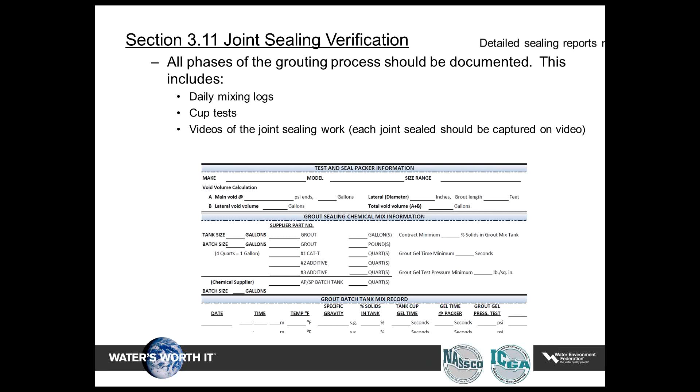So you should get documentation on the grouting, when it was mixed, how it was mixed, daily mixing logs, cup tests, which is nothing more than a regular test of your gel times, but those should be recorded. Videos of the joint sealing process, with each joint sealed captured on video, as well as detailed sealing reports noting the pressures and gallons pumped into each joint.

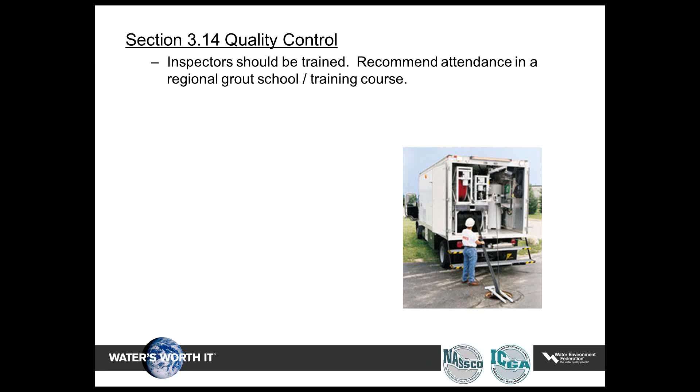Quality control is probably one of the most important processes of any grouting procedure. Inspectors should be trained. That's something we're seeing in the marketplace, with growing interest in chemical grouting in the industry. The next critical step is to train inspectors so they know what to look for, and I'd recommend attendance at a regional grout school and/or training course to get more information on chemical grouting.

Warranty testing should be required and should be completed. Typically, it consists of retesting a percentage of joints a year after sealing. So in a typical specification for test and seal operations, just before the warranty expires, the contractor should return and test a certain percentage of joints to make sure the seal is maintained. There are guidelines detailed within the specification as to what to do if they find an occasional joint that is not currently sealed.

This specification is available at sewergrouting.com and also through the NASSCO website. It's also available in Word format for NASSCO members. So it's a PDF, but if you're looking for that in Word format and you're not a member of NASSCO, I'd recommend joining. It's a small membership fee. You can get access to that Word document and make changes to incorporate it into your standard specifications for your company and/or your community.

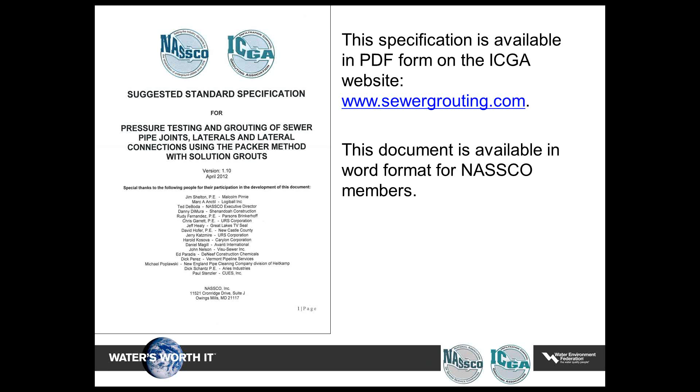With that, we're going to do an open forum of questions. We're going to get everybody involved who's been involved so far, so Ed and Dick and Marc and Daniel. We're going to go ahead and tackle a few of the questions that have been submitted by the audience, and we'll address those for a few minutes before our close. I think we've got just a couple minutes to target those.

One of the overwhelming questions coming through is costs. What does it cost to do a typical grouting project? I'll tackle that quickly since I'm part of the audience here. A typical grouting process for an 8-inch pipe is going to run you anywhere from $7 to $10 a linear foot as a budgetary number. If you're doing test and seal, grouting a service connection is going to run $300 to $500 per lateral, and manholes will typically run $500 to $1,000 a manhole. Those are all determined by the marketplace, current wage requirements, and the type of pipe and construction, but those are some good ballpark estimates.

A couple other questions we can hit real quick. Should laterals be brushed prior to grouting? Why don't you tackle that one, Marc? Absolutely. Fully reinstated and brushed, or we will get nicks and cuts at the base of the lateral, and we're going to lose a lot of time trying to bring those back and reinstate them. So definitely fully reopened and brushed.